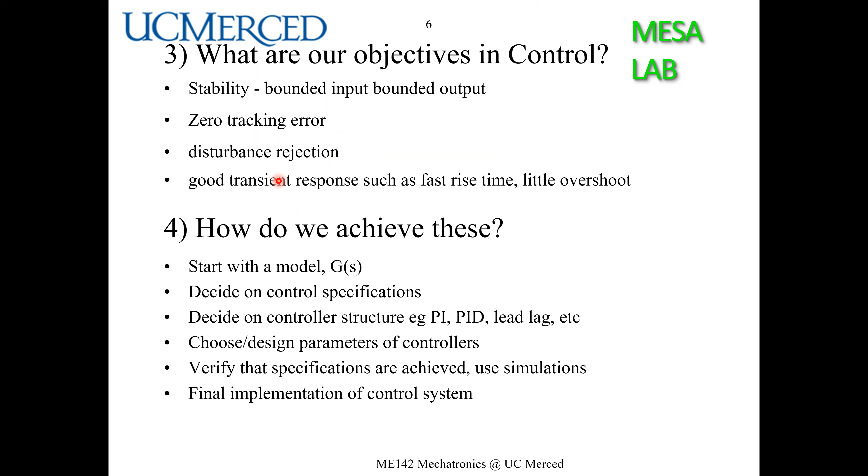What do we mean nicely? Nicely means, go back. Stable, zero tracking error, disturbance rejection, fast transient, okay, as fast as possible, and with little overshoot. But remember, I want to tell you that everything here, what we want, they are actually sometimes conflicting to each other. So therefore, control is sometimes also called an art of compromise or trade-off. Okay.

All right, so then you know that computer is everywhere and the digital control is almost everywhere. Therefore, when you do a control, you have two important blocks. One is this blue block called ADC. One is this block called DAC.

You have a good guess of this. It's called analog digital converter and digital to analog converter. So ADC, DAC. So this is digital signal going through this one, and this one is analog signal. Same thing here. This is analog signal. Then these are digital signal. Okay, so

I like this photo because I like this block diagram, because we have a human here, and I told you multiple times. And today, driverless car, unmanned systems are so popular.

But no matter how popular it is, it's still a special case of our mechatronics system. For any unmanned system, there is at least one human behind it. You should not think there's no human anywhere—that's no good. You should have at least one human supervisor monitoring this computer control system. Don't forget human in automation. We should seek harmony between human and automation, instead of excluding human factors 100%.

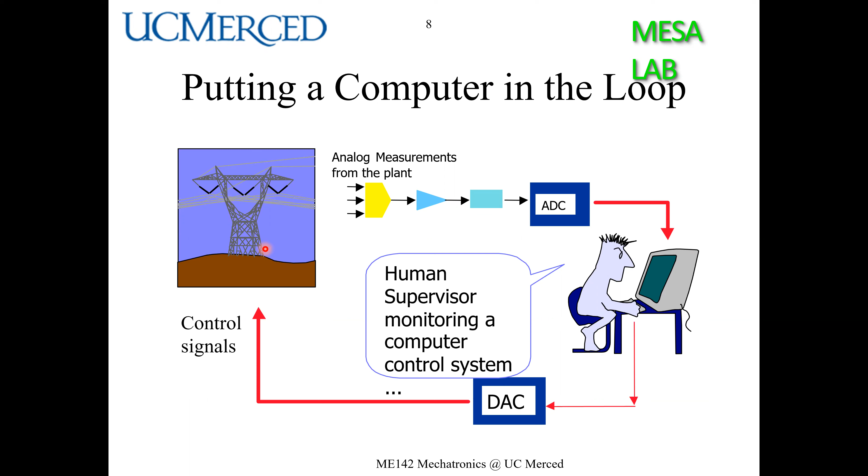In a real system we want to control, it is usually analog. But there are some systems that are intrinsically digital or discrete time—we're going to see that later. In this case, our controller here would be a continuous time closed loop system. What we need to do is build this as a digital control system, so inside the box everything is digital.

Outside is analog, so you have analog in, sampled. This switch means a sampler. Sampled, then it gets converted to digital. The set point is also an analog signal, sampled, and comes over here. This is digital—your controller is basically a digital filter. So this U is a discrete point.

But to make it continuous, you need something called ZOH—we're going to mention this in a later part of the class. It's called a zero order holder.

Let me see if I can write it... zeros... order... I don't know why today my pen is not working. It's very strange.

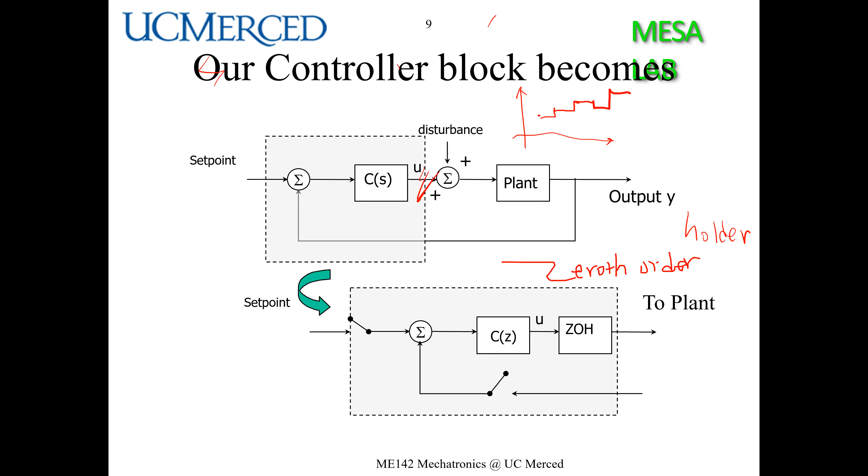So these are the questions we need to answer: how fast should we sample? We're going to talk about sampling theorems—this is a very important part.

When we sample and obtain a sequence of data points, how do we represent the relationship between input and output? We know that in continuous time domain we have G of S, the transfer function. But in discrete time, what should we do? Basically we need to start over from the beginning, starting with the difference equation.

And introduce the Z transform, how to solve the difference equation, introducing the pulse transfer function, and talking about sample data block diagrams. This part, system ID, we're not going to cover for long in this course, because building a system is a separate course called system identification. I do have a module developed, but as I told you earlier, this course needs to cover so many other missing pieces.

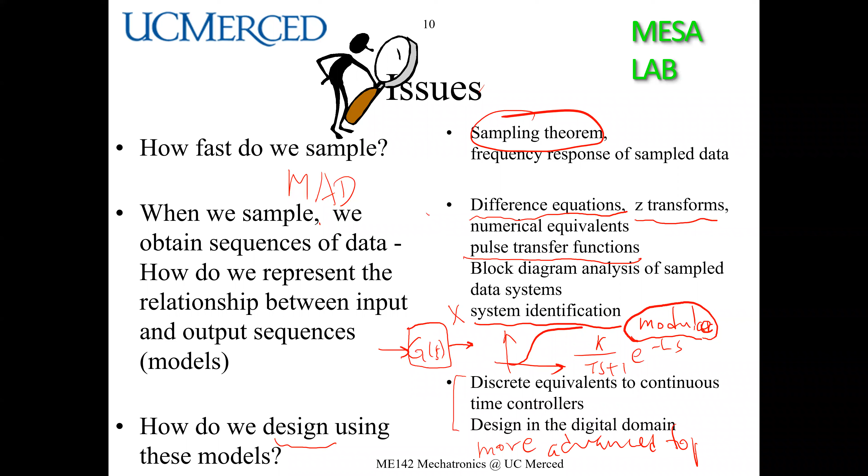Finally we have a design part, how we can put these controllers together, how to design them. We have several systematic ways to do the work, leveraging the continuous time domain design method. At that point, I'm going to talk a bit more about advanced topics, maybe after another two weeks.

So what is in this part? We are going to talk about the digital equivalent of the continuous time version, and what we mean by digital equivalent. Starting with Z transform, the relationship between S and Z, and how to do analysis and design in the Z domain. In the end, what you should learn from this module is understanding the issue of sampling—there are lots of implications. You will be able to implement a continuous time design in digital form, and how you do that.

Understand the problems involved, properties of digital systems, design in the digital domain directly. So all these are very important skills, okay? So let's go through a difference equation, and I think you may feel this is too simple, but be patient. This is a very important entry point.

Okay, let's start with room temperature control. So you have a lecture hall or classroom like that. You want to design the temperature control system. One, have good performance. Basically, what do you want?

You want the system to be stable. You don't want your temperature going up and down like crazy, or hotter and hotter. Okay, you need accuracy. When I say 70 degrees Fahrenheit, it will give me 70 degrees Fahrenheit, the desired temperature.

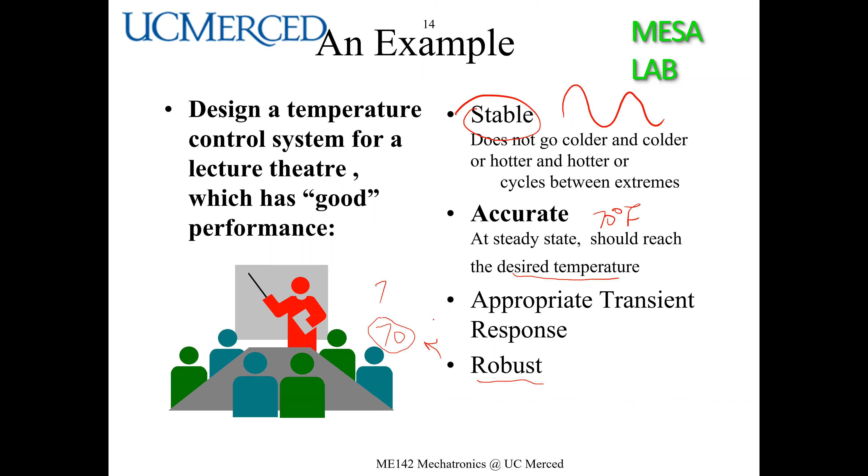Make sense? Okay, so transient response - usually when you say this is too slow, I want this one faster, well, you can have something faster, yes good, but you are going to have something like this: faster, but at the price of much bigger overshoot. This is overshoot, okay? So slower means your overshoot will be smaller. So there's a trade-off, as you can see here, right?

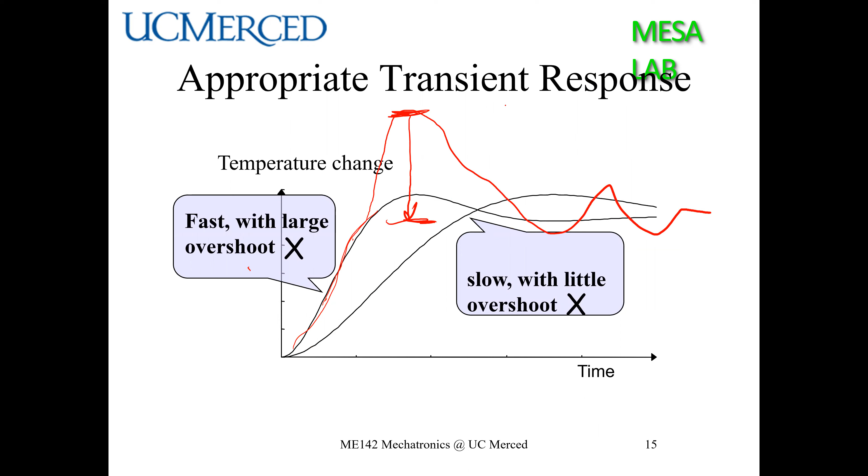And it needs to be robust. I explained to you the disturbance about how many people in the room, and depending on the weather of the day, whether it's a cold day or hot day. You cannot say a room temperature is under good control in summer but bad control in winter. You don't want that. It also needs to tolerate some modeling errors, since you don't have a very precise, 100% accurate model, okay, model accuracy. Because of that, it's probably never possible to have a 100% accurate model.

So that's why we previously talked about 2 interesting things in the quiz. The first is: all models are wrong, but some are useful. If you get this model and get your job done, that's okay, you don't really have to have a 100% accurate model. The second thing we talked about is: all models are wrong, and some of them are dangerous. Just imagine you do a aircraft training simulator, you use a wrong model, everybody trains on this, but when they actually get into the aircraft it behaves differently, and that will be a disaster, right?

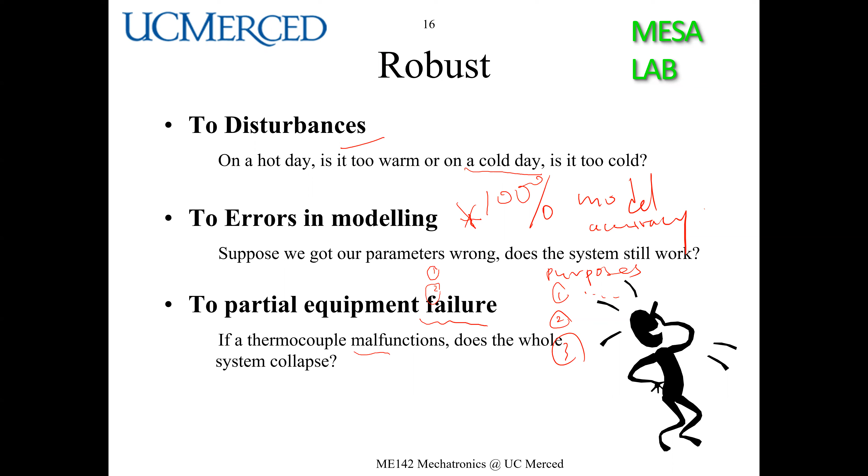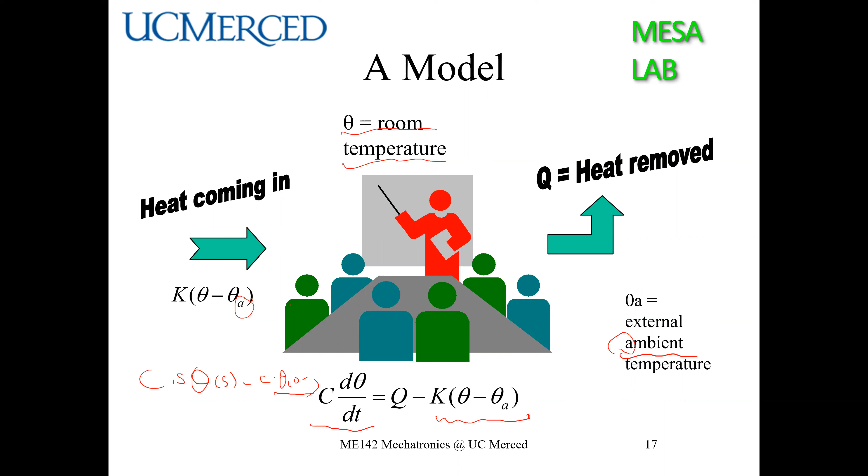So if we do Laplace transform of this one, remember when you have a d/dt, you should be careful. So it's s theta s. Then you have c times this one. But have you learned that we need to minus something called theta 0 minus, right? So this is the constant, so you also need a c in here. So if the initial state is not considered, theta 0 minus is not considered, so we just leave it there. So then we are going to have Cs theta s.

Then here Q is like input, the heat coming in, minus the difference between this one times K. So using theta as output, Q as input, this is the disturbance, okay, disturbance. So with that, you can see there is a first order system in here.

So what is the type of the system? It's a type 0 system because there's an s to the power 0 here, right? Remember, we ignored the initial conditions here. When theta 0 minus is not considered, this is small theta. The theta 0 minus is 0, zero initial condition.

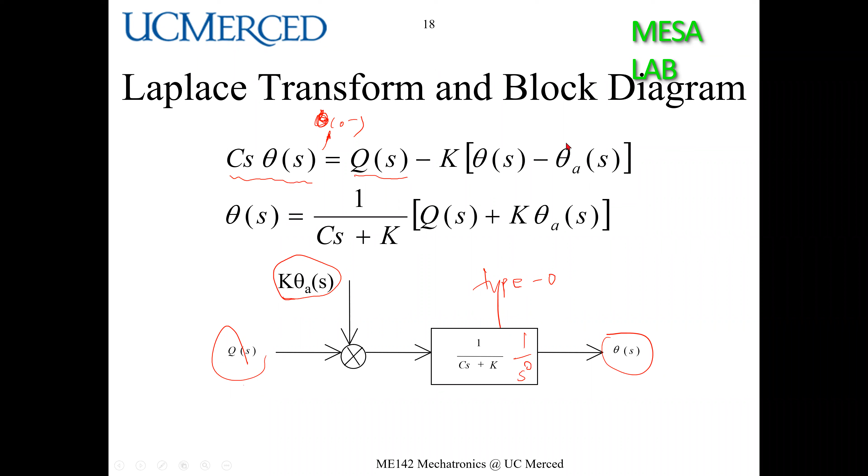Let me see what I have. We have a chat box in here. Go to the previous slide. This slide. Luis, why not you just ask? Open your mic, you can ask. It's okay, you can stop me. Can you hear me? Okay, maybe, let's move on.

So now we are trying to do a proportional control. This is KP here. So remember what we have here, this is a KP here, it's a proportional control. The proportional control.

Remember, I have a theta 0 in here. Okay, wait a minute, the theta 0 here showed up. It should be 0 minus, okay, but it doesn't matter, we can just, this is just a constant, okay, constant. But I'll put a KP in here. So SP here stands for set point, okay, set point. So this is a feedback, okay, feedback. But feedback, you said, oh, how about previously you put H of S in here? But for convenience, we just put the 1 in here. But in practice, this one can be a number, but that doesn't matter, we can just transform into this way, okay.

So we have a type 0 system, you can imagine I have a type 0 system, I have a KP control. So then what we can say about the ESS, it will not be 0, okay. It will not be 0. So we have learned this before, okay.

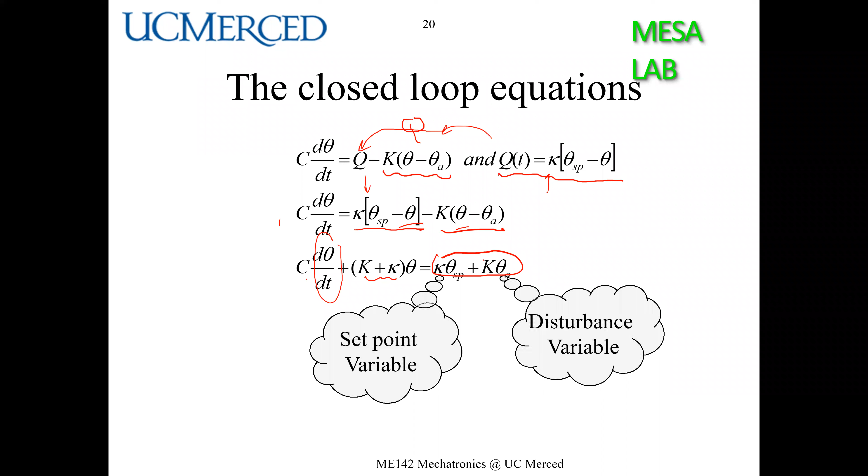So I'm curious about this, this is my differential equation. I want to study what is my steady state, SS. So when we see steady state, basically we're saying that the theta dot is 0, nothing is changing, so then we just cancel this term. What's left is to write theta is this one and this one, okay, this one.

Remember, K is fixed, but kappa, this kappa can change, so this one you can change, it's your controller gain, okay. So obviously, theta is not the same as theta SP, the set point. So therefore, there's an offset, in other words, steady state error is not 0, okay, it's not 0. So in this case, anything in the ambient temperature change will also change the steady state.

So we don't have the robustness to disturbance at the steady state. However, if you make your feedback gain huge, this is very big, such that the capital K can be ignored, then this is going to be 1. And because this is so big, this is going to be 0. So this is like 1 times theta SP, almost 0 times theta A. So you have to use very high gain.

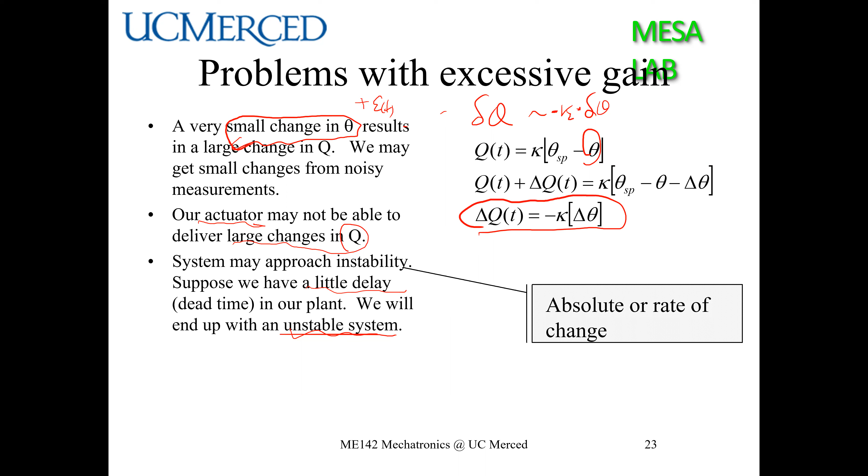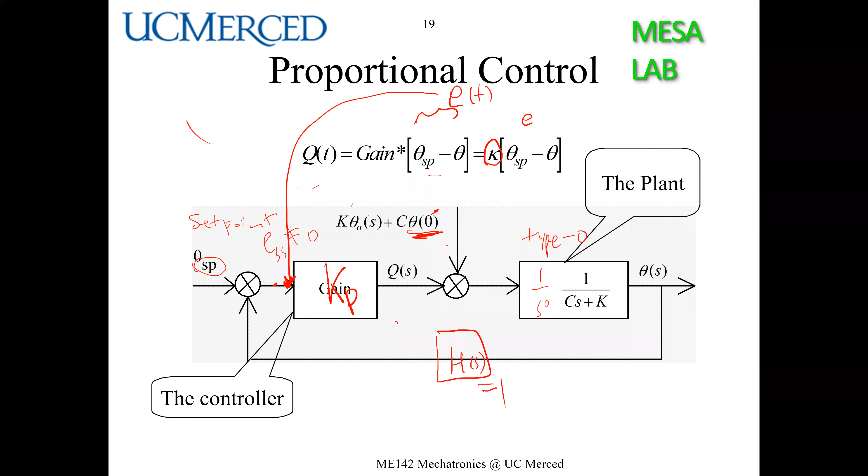So we have to change the idea about the control structure. There are many possibilities to do this, on KP. P controller is only one. You can use a PI, you can use a PID, and you can use a lead-lag controller like S+1, S+A, S+B, this type of controller. Or many others. In general, you have a C(s), so in general form.

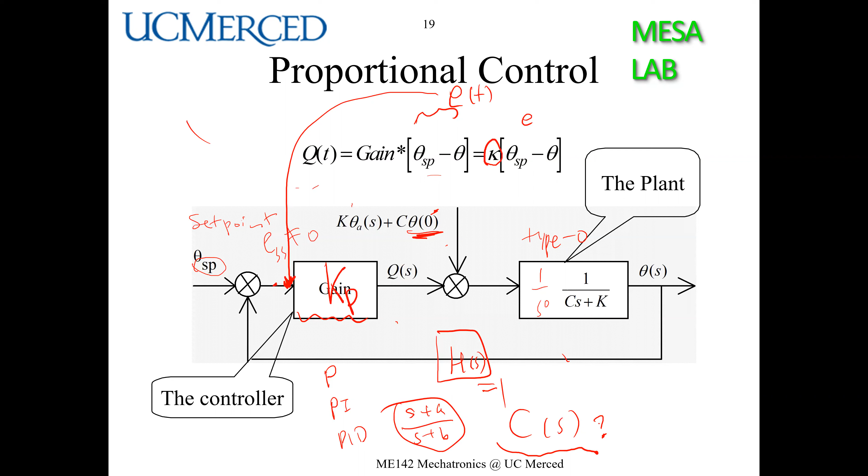So there are so many choices. That's why control people feel proud, because they can have their own pick of C(s) to do the job, yet have a better sense of robustness. That's why control people always feel proud, because there are infinitely many choices there.

Well, let's go back and talk about our plant system. So this is our classroom temperature control, from Q to theta. So this is a control signal.

This is a ZOH. So this is a sampling, this TS is the sampling period. So it's on and off periodically. It's called a sampler, with a sampling time, sampling period, TS. So everything inside this dashed line box is called a computer here.

Computer. So this is a digital version of the system. But what if we only can do something at the sampling instants? In between the sampling, I cannot do anything. Just put your hands off.

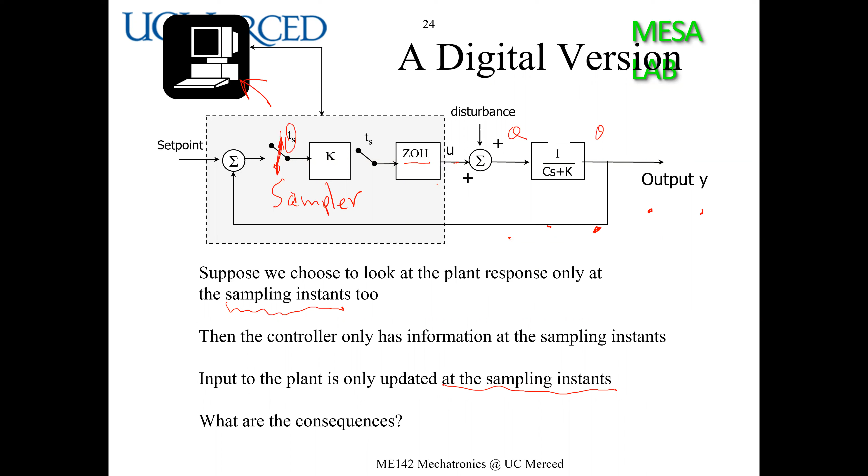But doing this way, what's the consequence? Let's take a look. So we're starting from here, this is our starting point. So we have a continuous time differential equation.

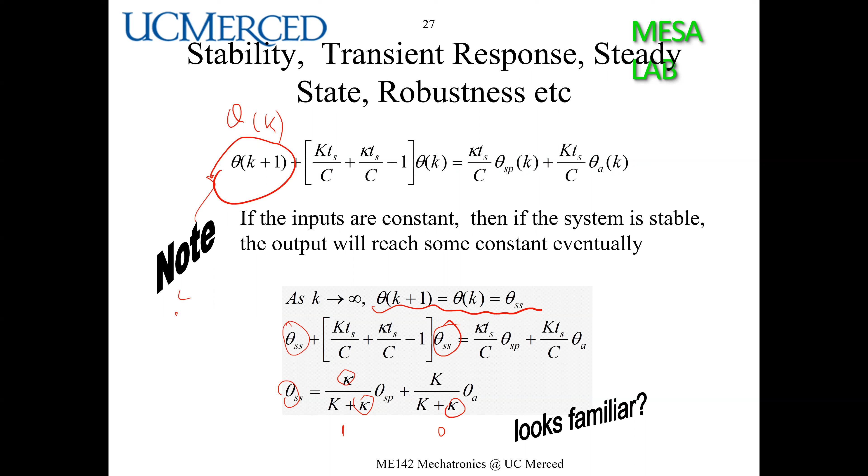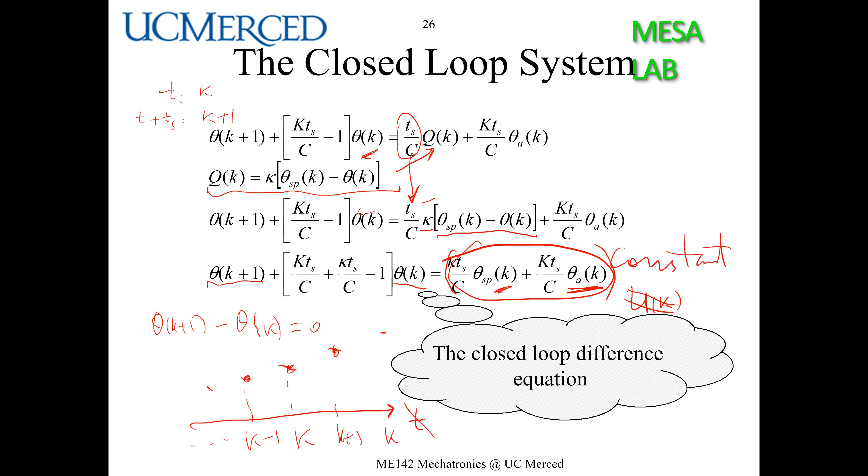Yes. All right, so we got an experience about discretization. Here, this is the equation. Here we are trying to turn the continuous time t into discrete points. So this process is called discretization. Remember, discretization could be more than one method. This is just the basic Euler formula, a type of rectangular formula.

So we actually are having something like this. So theta k plus 1, we have seen that this is theta k. There's a constant in here. Then let's assume this constant is u bar. This is a coefficient alpha. Then we simply write a difference equation. So this is the first order difference equation. First order.

I told you that if you can do first order, you can do high order, right? In the high order case, you simply turn high order into a vector form of first order. So that's why the first order is so important. And what is the solution here? We don't know, we don't know. We simply just try and error, saying that it's a constant A0, A1, and R to the power of K.

So this is something like a exponential, or no, this is a kind of geometric series. So if we put 0 in here, K is 0, then you have this one. So let's see, this is a general form. To solve this one, then we check what is A0, A1. So it turns out that theta k plus 1 is according to the solution. We have this, okay?

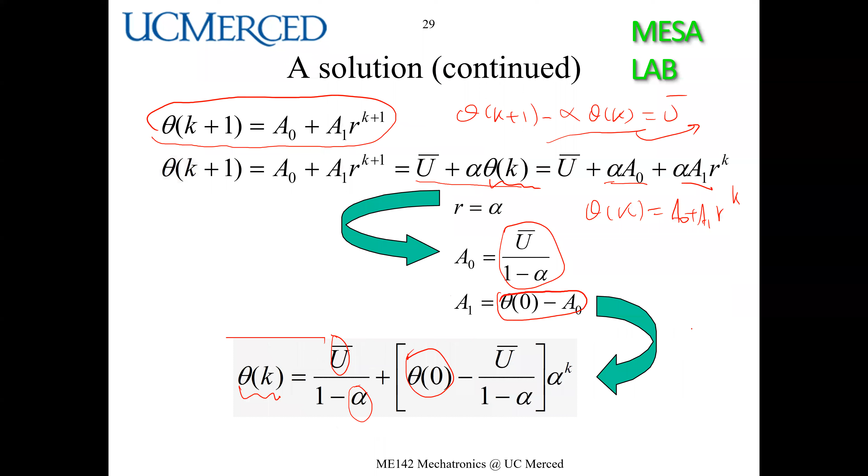So we know that in this case, if alpha is very small, it will converge very fast. If you have a large proportional gain, your alpha is small. So alpha, I said, go back 3 slides, this is the alpha, it connects to T, in the T. So if my Ts is so small that it's basically 0, then alpha is 1.

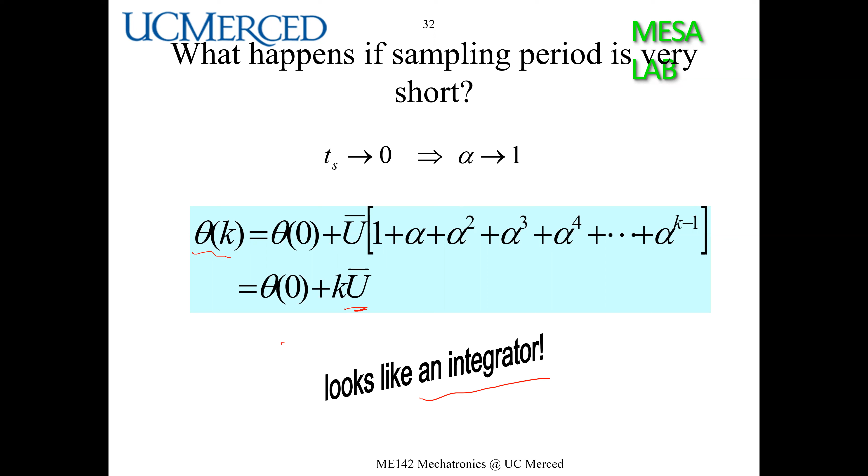So here, to check whether the system is blowing up, basically we see if alpha is less than 1. So yeah, if alpha is 1, then in the end the theta is like integration of my u bar, it's like an integrator. If sampling time is too long, then alpha becomes greater than 1, and the whole thing will diverge, blow up.

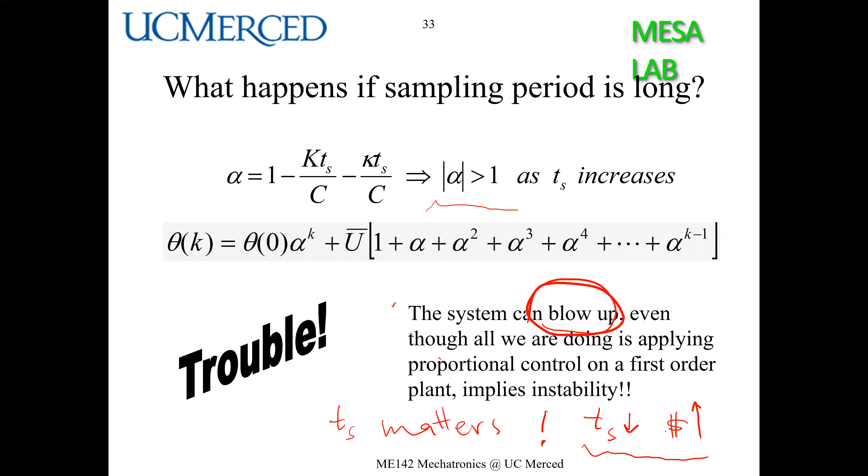So this story tells us Ts matters. If you don't choose Ts properly, you have consequences. But on the other hand, how do you make Ts too small? You say, oh, I use a smaller Ts. However, the cost will go up to buy hardware to do much higher frequency sampling. But it's reasonable to know that going too fast than necessary is a waste of money. So you should not go too slow, not too fast.

So how do I know then? We need to learn some mathematics. In this case, we're going to work with difference equations, and we borrow the idea of Laplace transform, so we use Z transform. And we don't do root locus here. So let's move on to the next stage, formally studying the solving of difference equations of first order. Usually first order is a scalar, then for high order you can convert to first order, of vector form.

Okay. Then we should learn the Z transform and understand the impulse response function. Let's start from here. What's the difference between what we learned here and previously? Previously, we say this is a constant. What if this is not constant? It's also changing with K. So this is a general situation, right?

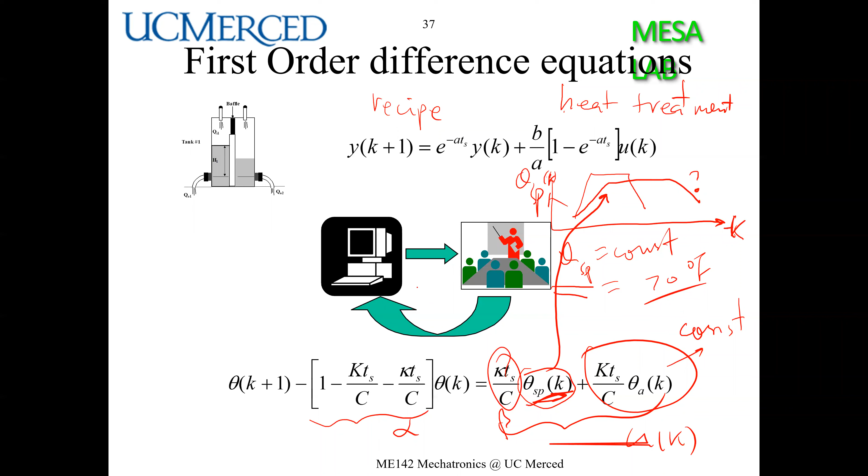Make sense? So in many process controls like pharmaceutical, petrochemical plants, usually they need the temperature set point to be changed. And this kind of way of changing is called a recipe. Think about your cooking. Your cooking also has a set point that's a temperature. Your cooking is also complicated, I don't want to talk about it.

So let's try to solve it, okay? Remember, we started with something like this: x k plus 1 minus alpha xk is beta uk. But they didn't use brackets, they use a subscript. That doesn't matter to me. So this is, say, the subscript to save the brackets.

So let's do enumerating, okay? We're starting from 1 until K, so just brute force from the beginning. U0, x0, you get x1, U1, x1, you get x2, you know. So then you have x1 again here, then you put this one in here, you write in terms of x0, u0, and u1. And keep doing this, you end up with something like that. So you only have alpha to the power of k times x0 left, but in the end you have a complicated form like this.

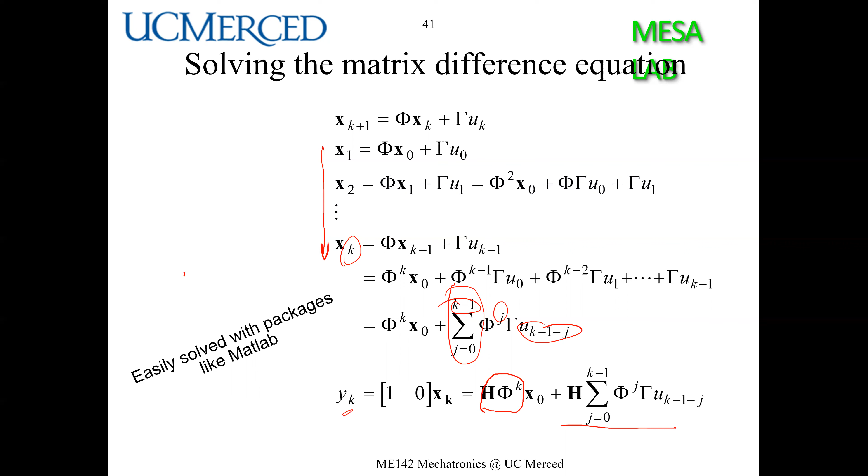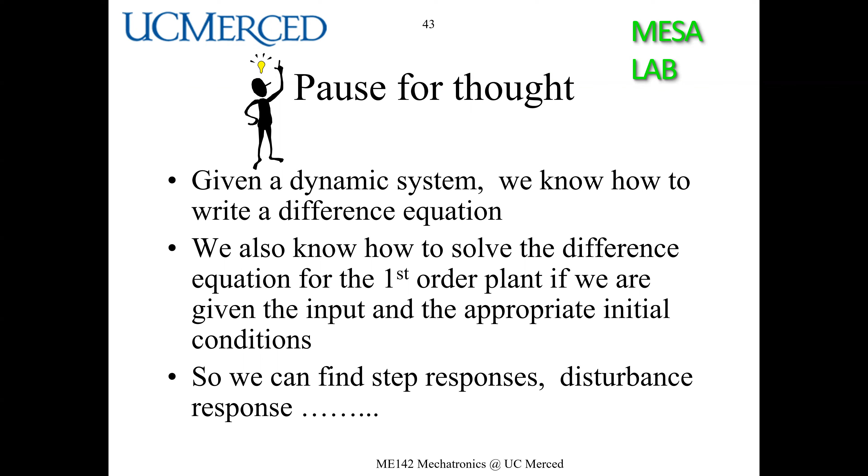So right now we can solve the original difference equation in a recursive form, but it's still very involved, okay, involved. We hope we can do something in a similar algebraic form. That is the Z transform, okay, Z transform. And we hope we can use all the techniques we learned in the Laplace transform method, okay?

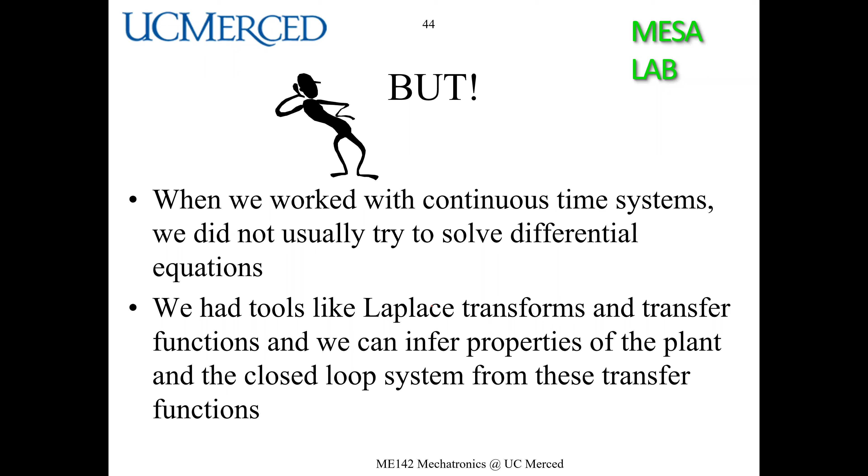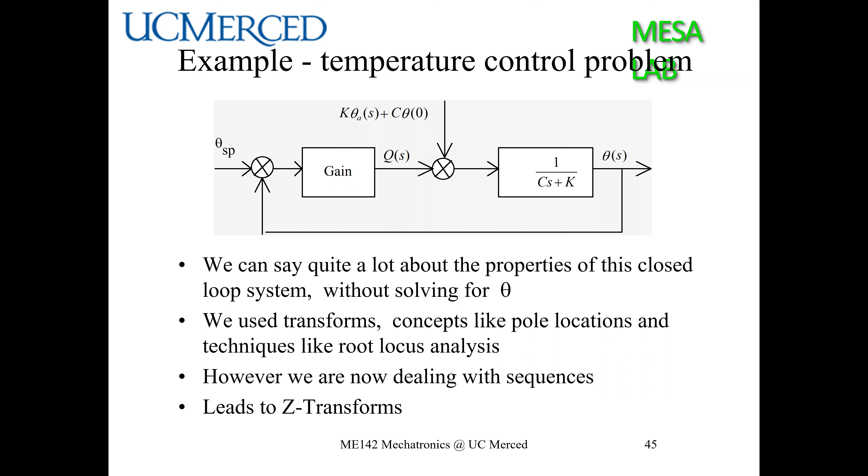So for continuous time systems, we didn't directly solve the differential equation. We actually turned it into an algebraic equation, okay? So then we use the transfer function concept. So for temperature control, like this continuous time system, we use a transfer function like that. So this is the Laplace transform domain, okay? So therefore, we are going to learn the definition of the Z transform in parallel to the Laplace transform.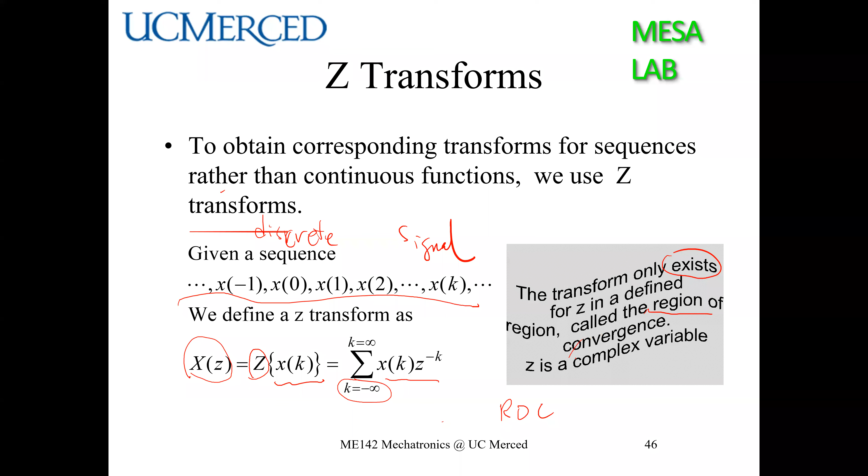But this is based on the assumption that this limit exists, okay, exists - but it may happen that this summation does not exist, does not converge. We don't call that a transform then, but it usually has a convergence domain, okay, domain of convergence, or region of convergence, ROC, okay. So let's do an example here. So we have - this is minus infinity, this is positive infinity, these are discrete points. So the X sequence is these dots when - so this is like a heaviside function, okay?

Heaviside function - it's a unit step function, right? But now you don't have a line here anymore, you only have discrete points, okay? Discrete points defined like this.

So no matter what your k is, as long as it's greater than 0, it's always 1, 1, 1, 1, okay? But we add this together, so it's the same as starting from 0.

And remember, if you have something like this, what do you write? Do you guys still remember I did something for you? Let's say Sn is 1 plus alpha plus alpha squared plus... plus alpha to the n minus 1. So then I know this equals 1 minus alpha to the n, over 1 minus alpha, right? So I derived this for you just now, okay? I told you how to do that.